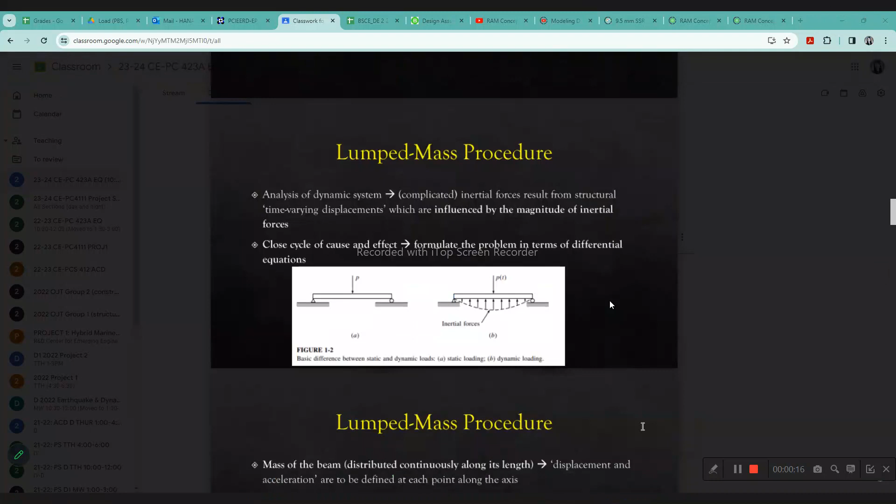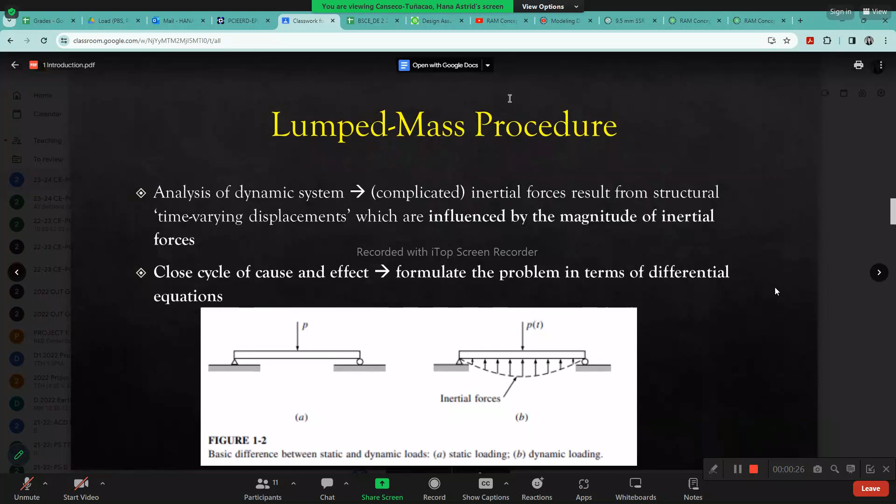So can anyone please leave a recap on what has been discussed before the exam? Hello? Hello? Sandali.

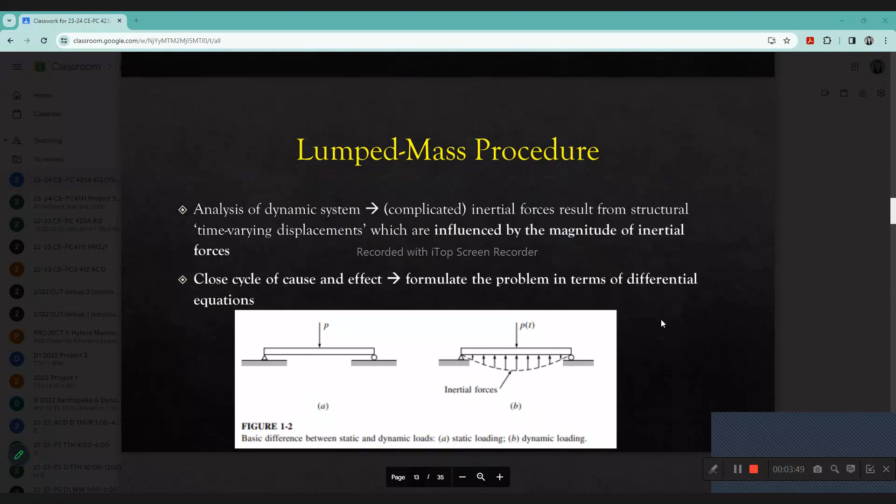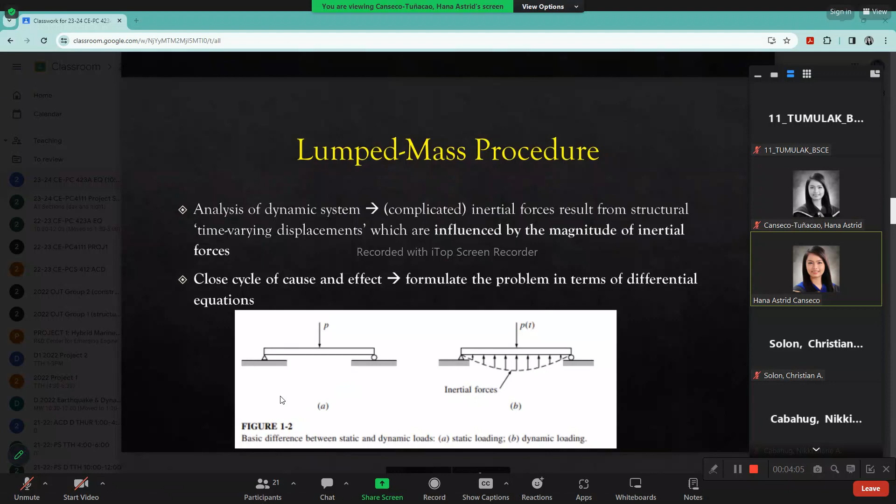Palihog. Sige. So akong i-assume nga ang kanang wala nag-camera on, absent niya.

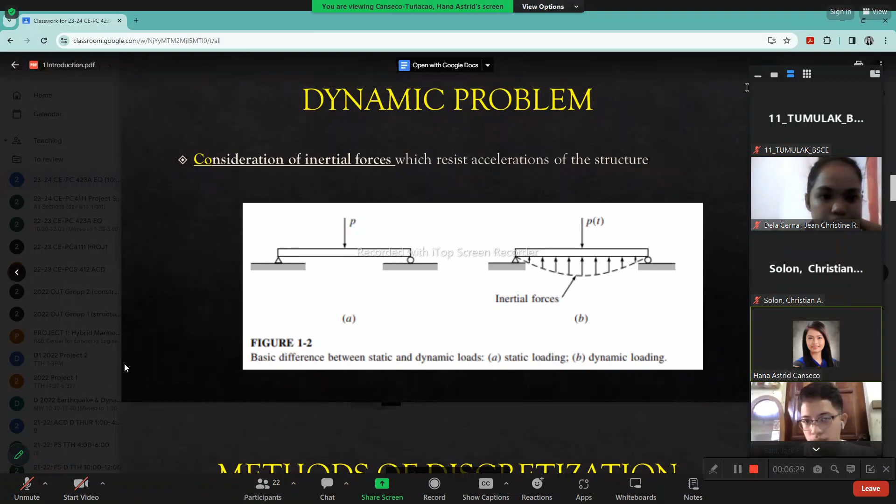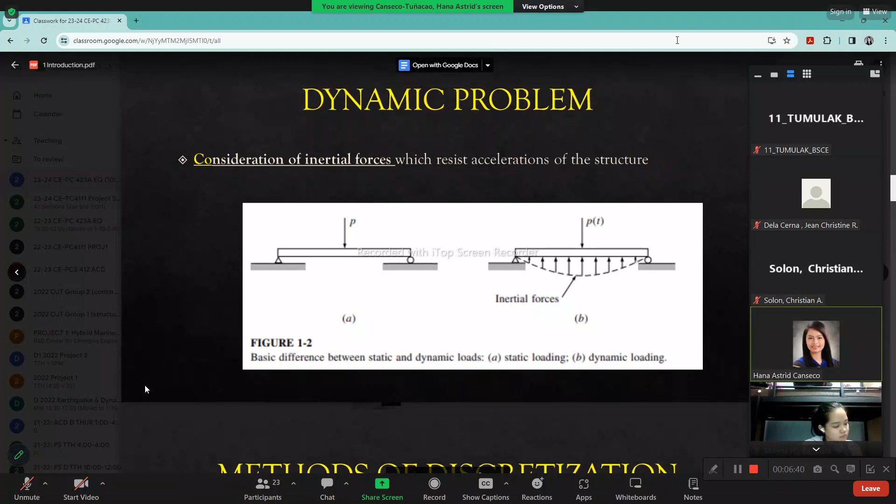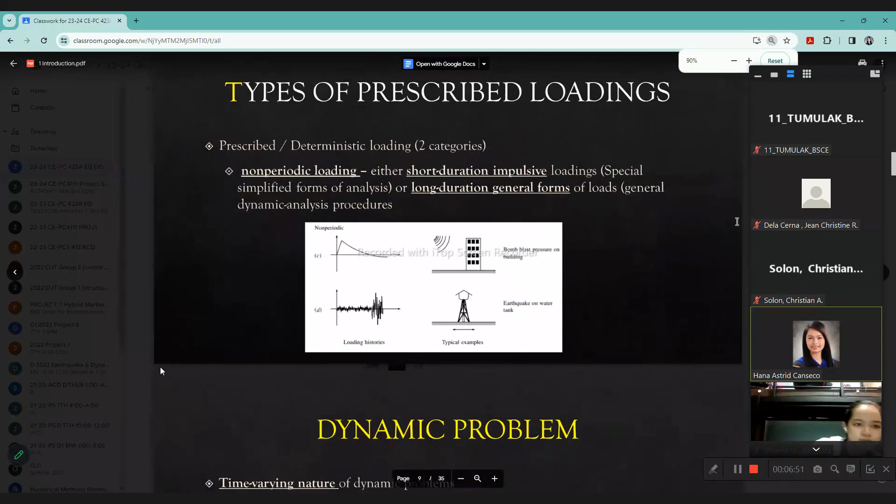Okay, I think manageable na tong midterm exams ninyo, no? Kaya naman siguro to, this year naman ato i-calculate ato, ang ipag-calculate compared to last year. Okay, let's proceed. So I think manataan ni, sakto ba? Manataan ni? Hello? Sorry, yes, okay.

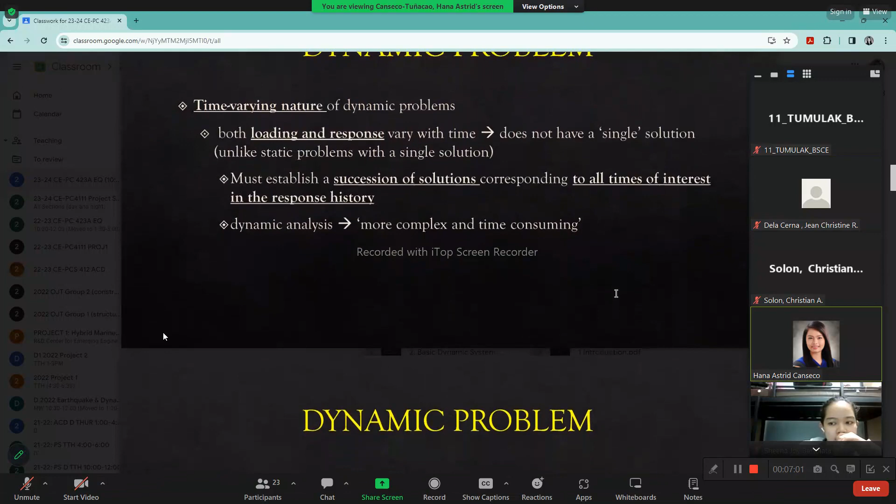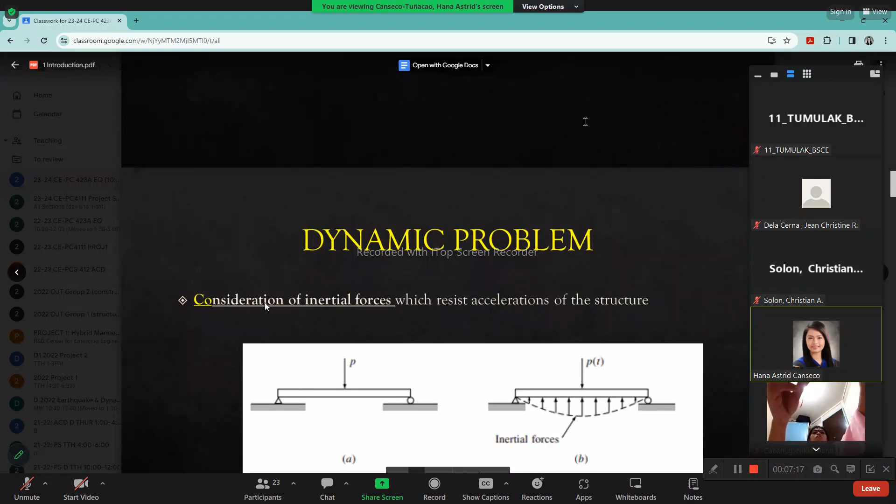Miss, okay, libog ko ang online. Anyways, this is Zoom, no? I prefer to do the Zoom kay makasuwat-suwat ko ba ang Google Meet pa kay kuswito. So expect nga duha ni ka sessions. If maputol, use the same link to join the class again.

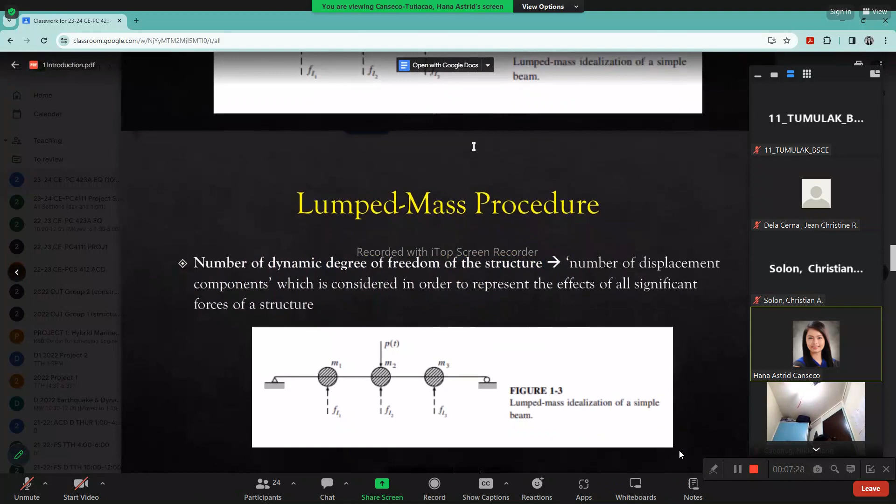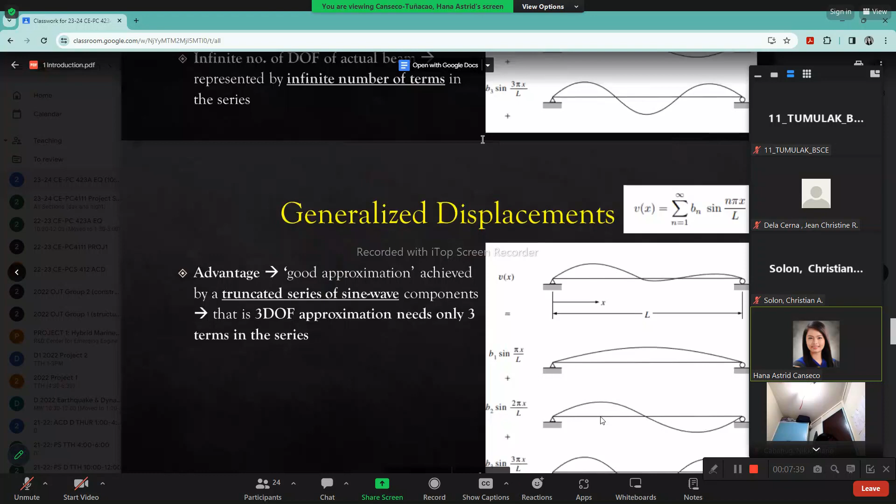Okay, I think manataan aning lumped mass na. Okay, I remember this one. And niabot na ta atong general. We're done with this, so this one. Okay, kani, this was the last equation, if I'm not mistaken. Kani siya. Okay.

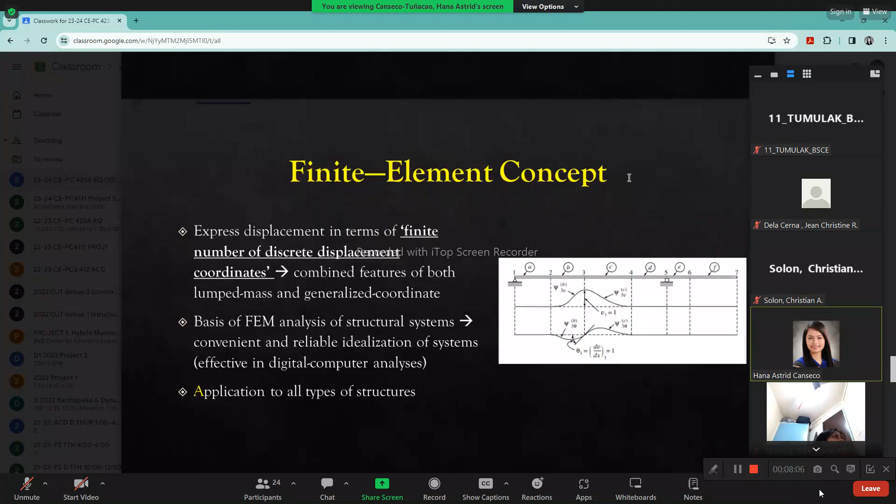Okay, so the next topic, the next discretization is with the use of finite element concept. So it expresses displacements in terms of finite number of discrete displacement coordinates.

So ang atong kasagaran nato ang consideration. Considerations kay ang atong supports, no, kay mga reactions and not. But for this case, kuan na siya, every point ikuan nimo o kita. So mali siya, discrete displacement coordinates, combined features of both the lumped mass in the sense that you are taking lump for every dx considered, and the generalized coordinate wherein you are using your generalized equations. Okay, this is the basis for your finite element analysis of your structural systems, no?

So kung ato ni-inon, manu-manohon ni nato, puto bragyod tag inang klase nga beam ang atong masolve, and it would take much effort on our end, no? But because we already have supercomputers, these are very powerful, so it can analyze full structural systems.

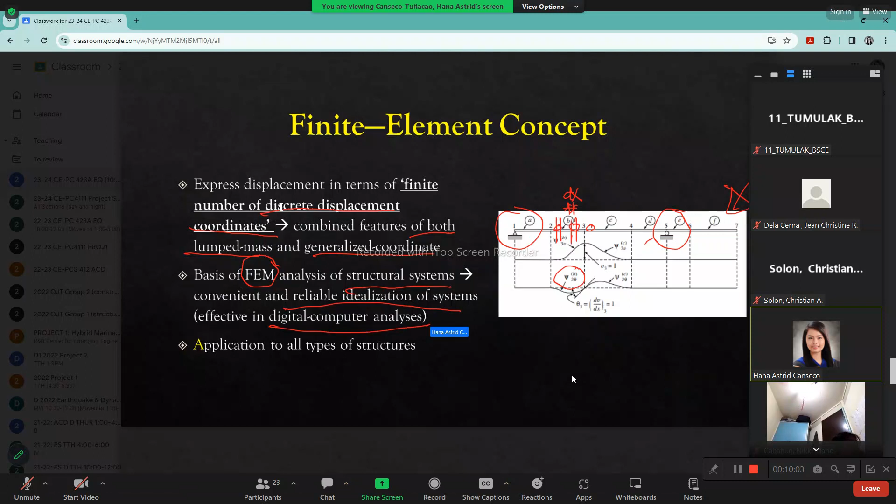So this is convenient and reliable idealization of systems, and is effective in our era, no? So did for the use of digital computer analysis. And this is applied to all types of structures.

So if you notice, we have very many softwares, no, structural analysis softwares. Um, naasay if nakabantay mo, na ay gatuyok, na ay bagong i-introduce na Filipino made software. I think it has been received well. Ang point lang sa uban na nakatanaw, na software is it still uses the conventional analysis. Dili siya finite element.

Nga naagya po kay node o naagya po kay member, node and member analysis siya. Dili siya finite element because this tool, dako kayo imong computational demand ani. I think this is best applied to member behavior. Okay.

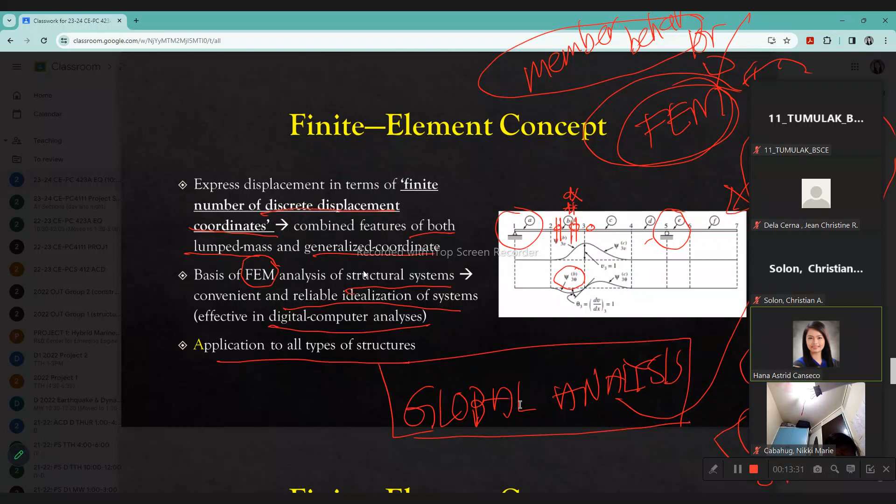Although it's a Filipino software, it's global, but it does not use finite element analysis. So I asked them about the accuracy of the software in a global analysis, since it has taken into consideration global analysis or global behavior of the structure, and whether it would accurately capture member behavior.

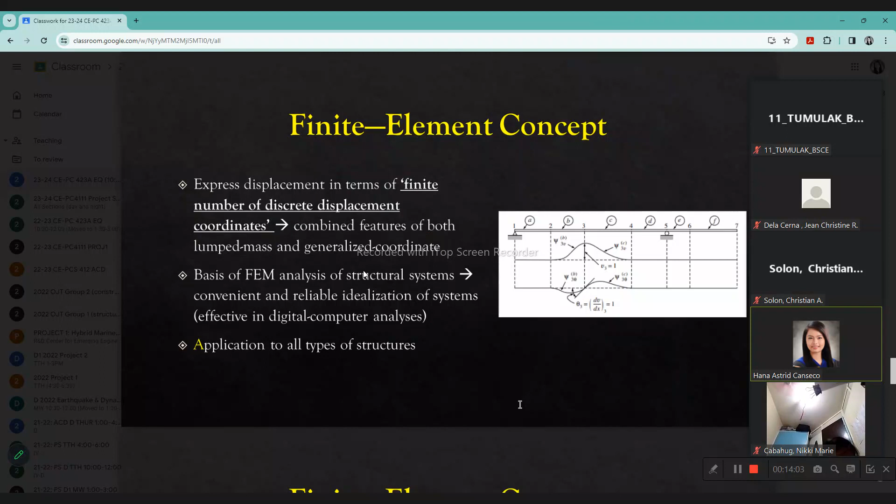Dr. Naveed Anwar said that while the software gives you the necessary stresses and demands, we have to provide engineering judgment because we have to be careful of the member behavior. If there is an aspect of the structure, let's say this one, small and next to your column, we know that this would inherently behave differently compared to these longer, normal-looking beams.

So he said, just to ensure that your design would be on the safer side, you need to run finite element analysis for special members to check on the member behavior. Just need to be careful and we must know the background of the tools that we are using. Okay? Not solely be dependent on the software, and we need to know because we have assumptions.

And these assumptions need to be within certain extent. Like we're designing buildings that are being utilized by many people. There's a lot to discuss about this. So, the basis of... where is it now?

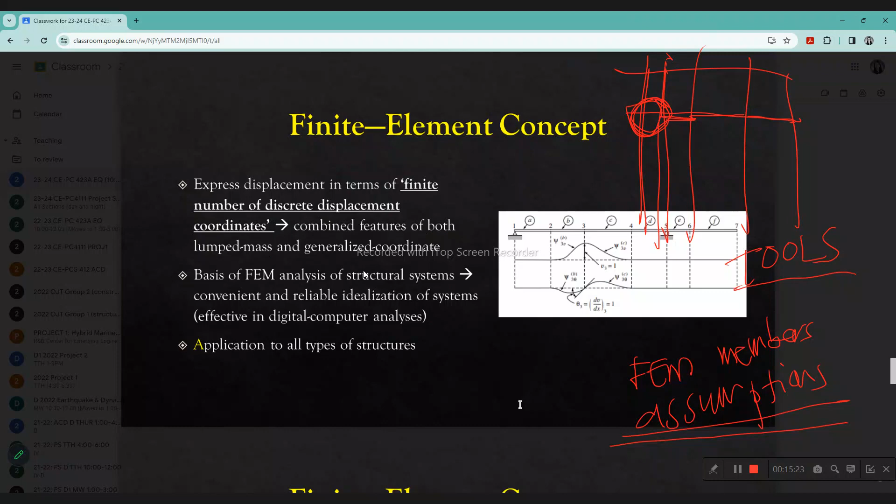Okay, let's go to the next slide. So, obviously, this is the most efficient procedure for expressing displacements of arbitrary structural configuration by means of discrete sets of coordinates. The advantage is the desired number of generalized coordinates introduced by merely dividing the structure into an appropriate number of segments. But the question lies, how many segments are required to reach this level of appropriateness?

How many is many? That's always the question. And what I can tell you is experience can tell you that.

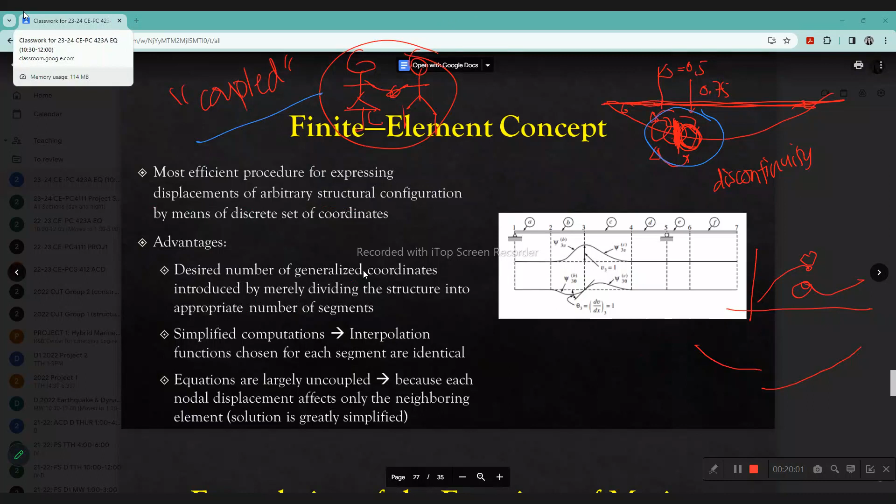I learned the term coupling when I was in master's, and I was confused about what they meant by this. So for this case, my equations are largely uncoupled.

Because of how many segments you consider - this segment and this one is one beam. So for this beam, since it's just one, every cut is coupled to the next.

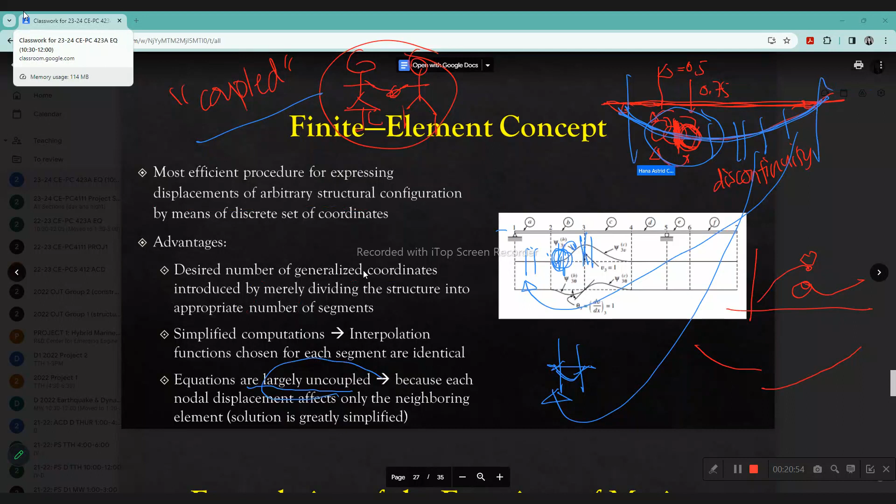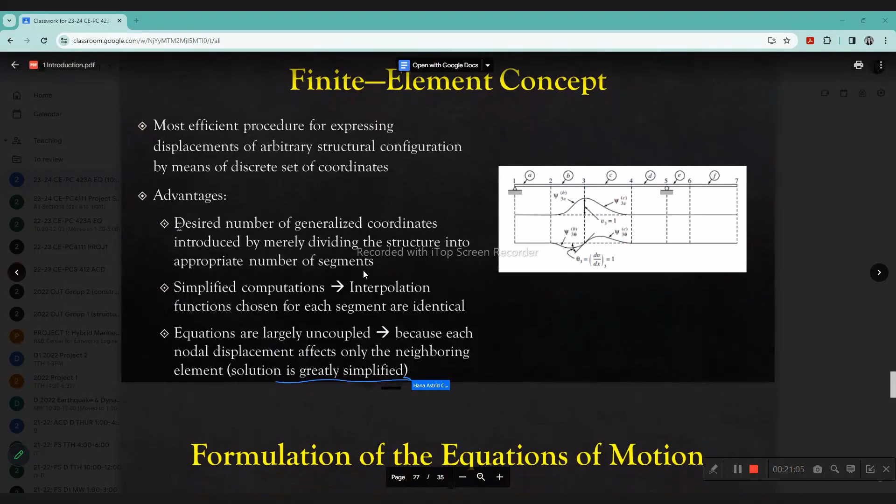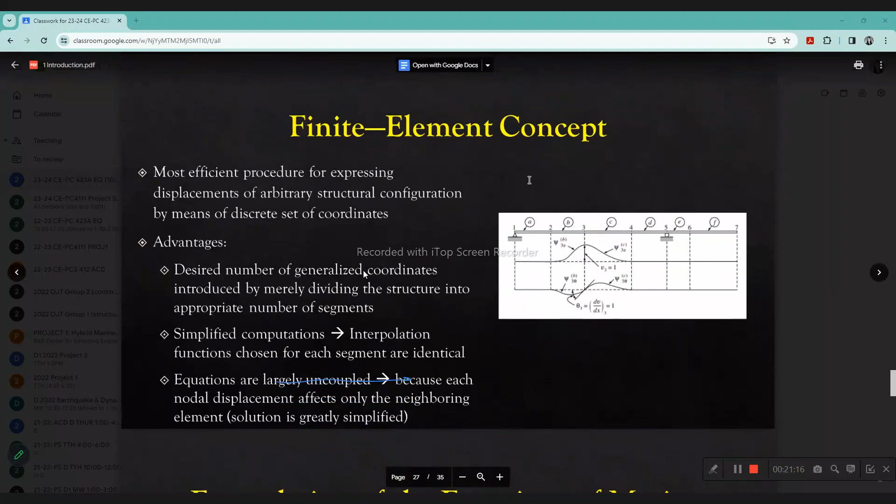Now, the disadvantage of this - if there is a disadvantage, it's next. The disadvantage of this is greater computational effort. The smaller dx you have, the greater your computational effort.

So, formulation of the equation of motion - displacement time histories of a given structure subject to time-varying loading. The objective of deterministic structural dynamic analysis: we're concerned with the displacement. We have displacement time histories dependent on the ever-changing loading histories as well.

With approximation analysis limited to a number of degrees of freedom, the problem is reduced to determination of time histories of selected displacement components, or selected points that we consider. This makes it an approximation, but it makes the analysis shorter and simpler.

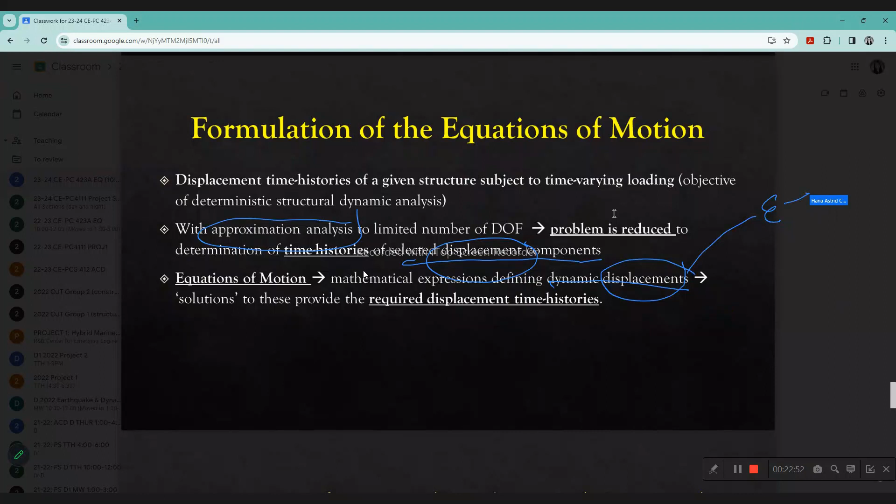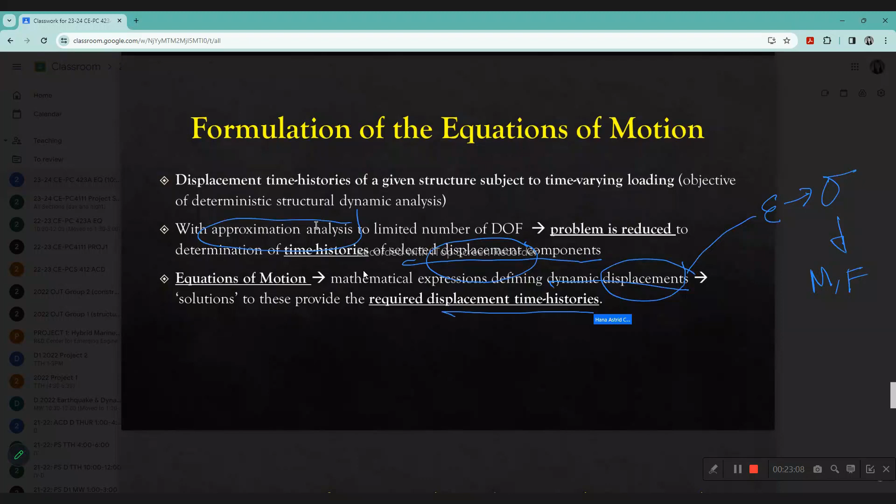The equation of motion is a mathematical expression defining dynamic displacements, because our target is displacement, so we can get our strains and eventually our stresses and demands. Solutions to these provide the required displacement time histories.

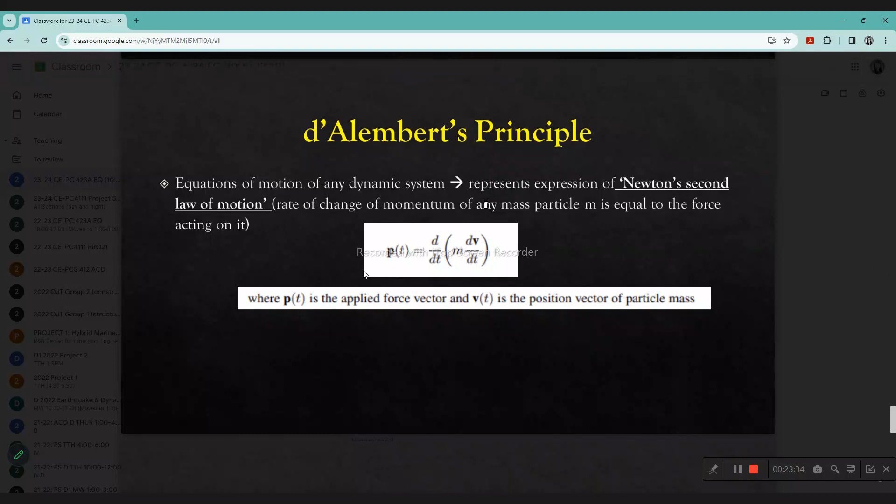Equation of motion is a fundamental concept, based on D'Alembert's principle. The equation of motion of any dynamic system represents expressions of Newton's second law of motion: the rate of change of momentum of any mass particle m is equal to the force acting on it.

P(t) is the force, your applied force vector, and v(t) is the position vector of your mass particle. This is the second law of motion.

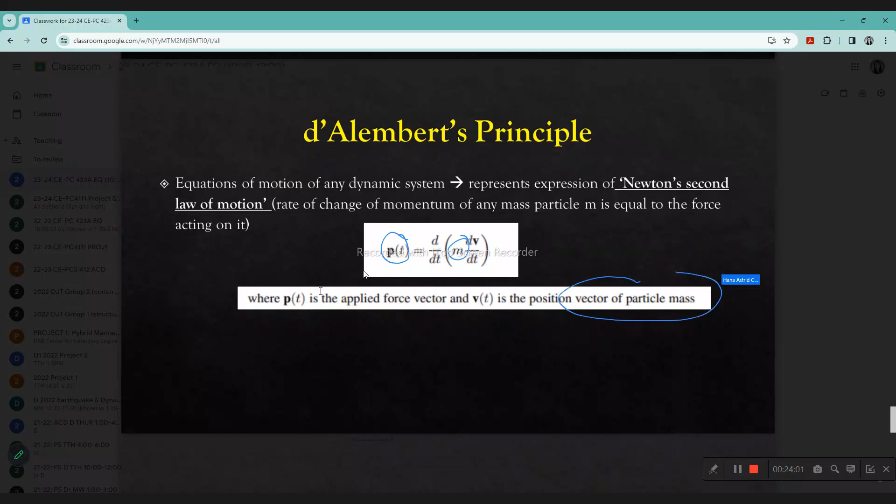For most structural dynamic problems, mass is constant, meaning it does not vary with time. Which makes sense - our building weight is constant, it doesn't change.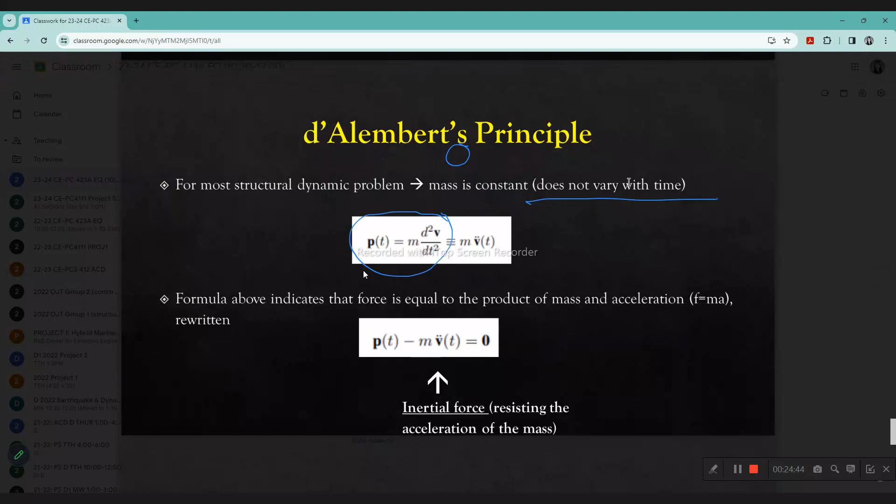Since we derive this whole term knowing mass is constant, this changes to the second derivative of v with respect to time, or simply v double-dot, representing acceleration. The formula indicates that this varying force is equal to the product of mass and acceleration, that is F equals mA.

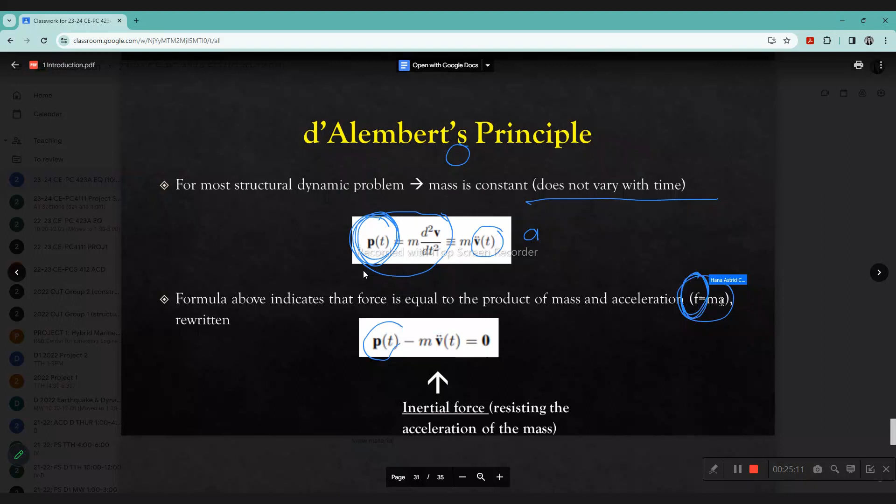If your F is varying with time, and consequently your A is also changing with time, it is rewritten as this, where this part right here is your inertial force resisting the acceleration of the mass, coupled with your acceleration.

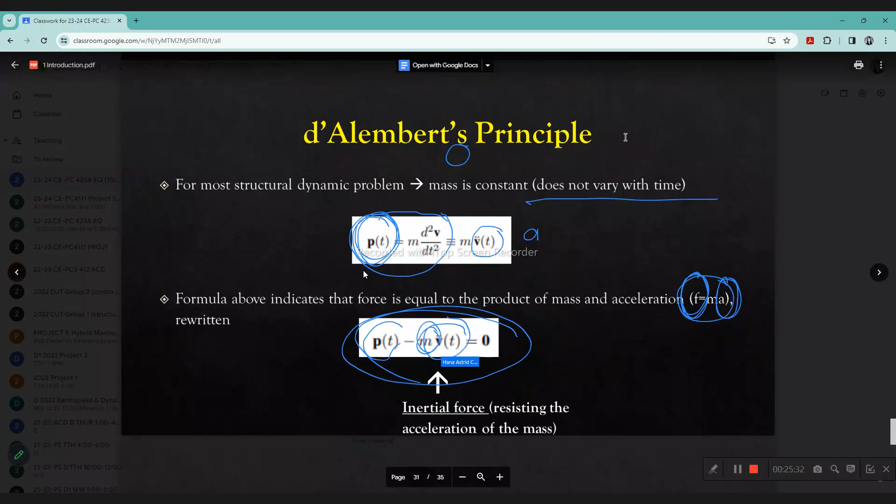So the concept is a mass develops an inertial force proportional to its acceleration and opposing it. This is very convenient in structural dynamics. It permits the equation of motion to be expressed as an equation of dynamic equilibrium - equated to zero and still in equilibrium, but here we consider dynamic equilibrium by accounting for all the objects in motion.

P(t) represents the types of forces acting on the mass: elastic constraints which oppose displacements, viscous forces which resist velocities, and independently defined loads. The equation of motion becomes an expression of equilibrium of all forces acting on the mass - whether it be external load, elastic constraints which oppose displacement, or viscous forces which resist velocities.

Elastic constraints which oppose displacement - what I can think of is a spring. Your spring has an elastic property, which we usually call K. This elastic property opposes displacement; it has that nature of opposition.

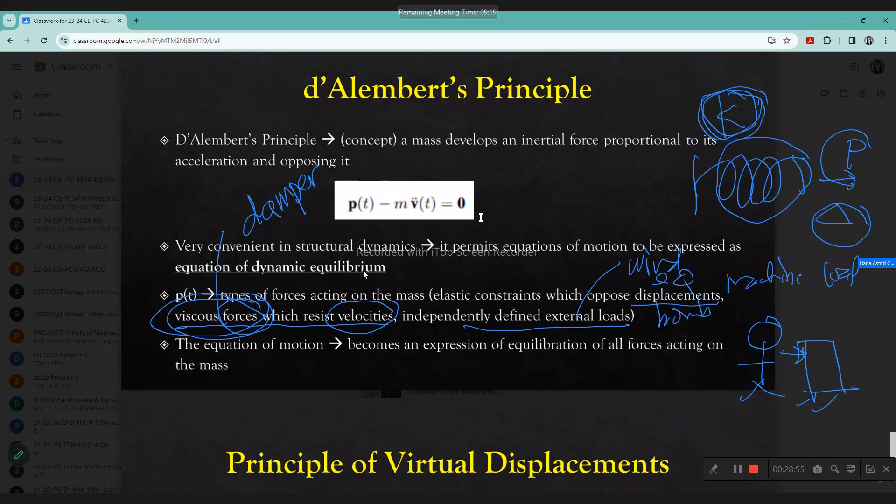And our independently defined external load - for example, if I were to push on something, that's external load. But for realistic schemes, this would include wind load, earthquake load, blast load, machine load, etc. We discussed this already earlier - the equation of motion becomes an expression of the equilibrium of all these forces acting on your mass.

So let's do the basic dynamic system in our response spectrum. We have this, the components of a basic dynamic system.

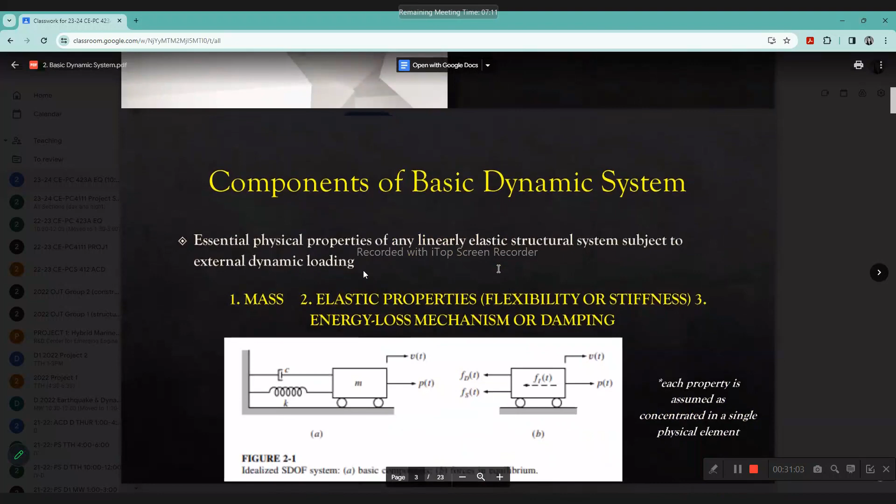Essential physical properties of any linearly elastic structural system subject to external loading: you have your mass, your elastic property or flexibility. Stiffness is one over flexibility - they are inversely proportional, but both define elastic behavior, or elastic properties.

And then we have your energy loss mechanism, commonly known as damping. Let's take a look at this figure - this is your basic component. Note that each property is assumed as concentrated in a single physical element.

This is your basic, idealized single degree of freedom system - imagine a building. You have your damping represented by a dashpot.

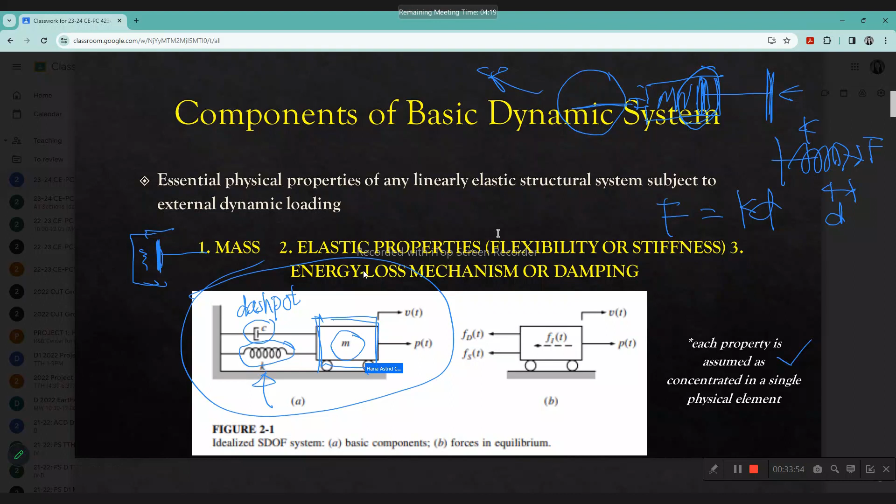That's from basic physics, force is equal to K times displacement. Okay, spring. The force, your K, or your displacement - change in length, or delta. Delta, change in length of your spring. And then we have the mass of your structure. So, in equilibrium condition, your mass is associated with your inertial force.

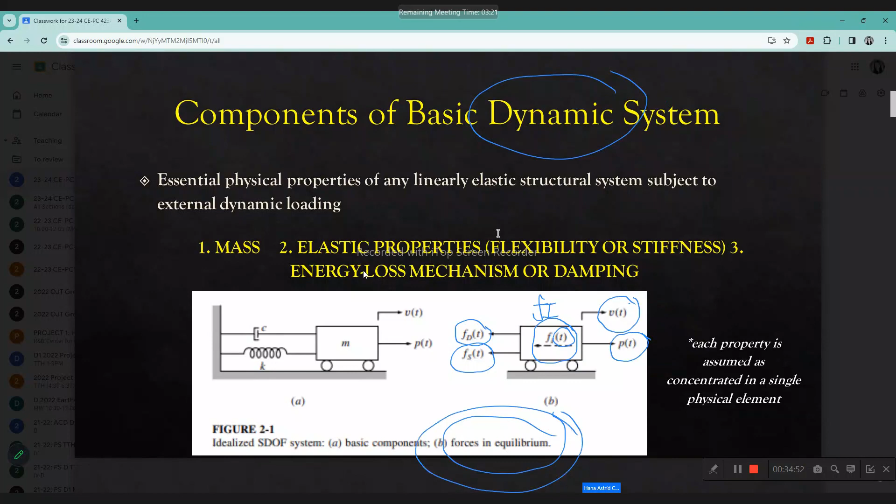That is Fi. Please take note everyone, all of the components have a 't' notation because it's considered dynamic behavior and it changes with time. This is your FD representing your damping force, and Fs representing your elastic force. This represents your displacement - displacement vector, that's V, changes with time. And this is your applied load. That is your forces in equilibrium conditions.

So mass is the rigid block with rollers. It moves in simple translation, that is, we have one directional displacement. We have 1 degree of freedom, and that is, for this case, along the x direction. Vt represents your one directional displacement relative to time. Elastic resistance to displacement is provided by your weightless spring

with stiffness K. You have your energy loss mechanism represented by your damper C, and external dynamic loading producing the response of the system as a time-varying force. So it's always emphasized that the spring is weightless.

Let me ask, where does the K come from in your building? Where does the spring come from in your building? Can I have Lisa? ... Yes, column, column stiffness. This is actually representing your member stiffness, from the column, from the beam, from the slabs. All of your members have stiffness.

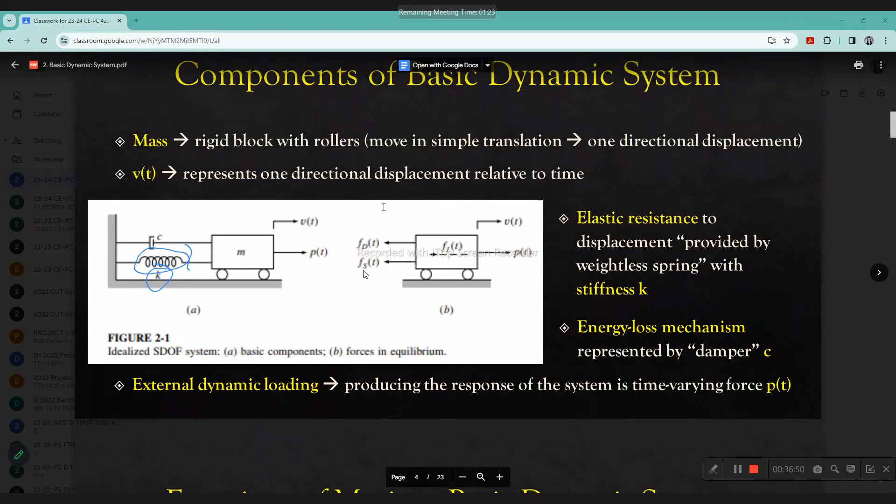Thank you, Lisa. And then, it can be formulated by directly expressing equilibrium of all forces acting on the mass. So, summing forces in X - you have your applied force and your resisting force resulting from the motion. That is inertial force Fi, damping force Fd, and spring force Fs. So summing all the forces, these three are equal to your applied external load. And all of these are functions of displacement Vt, or one of its time derivatives.

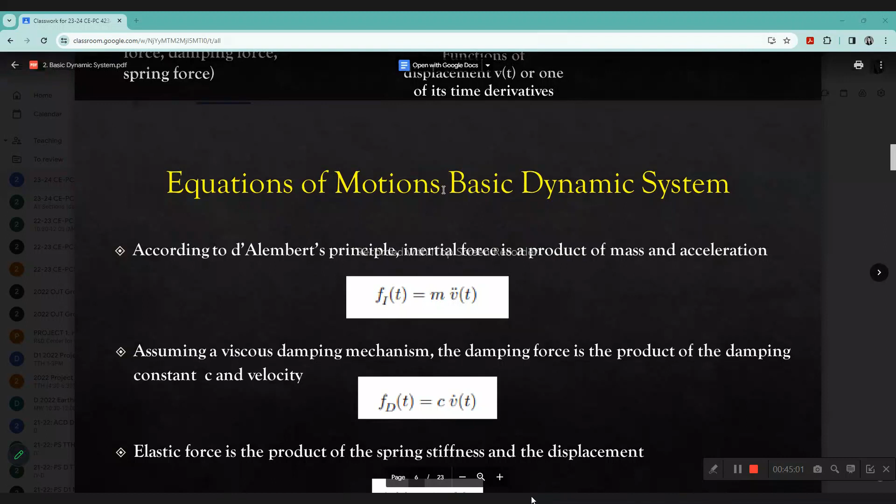According to D'Alembert's principle, inertial force is a product of mass and acceleration. So we see here, F is equal to ma. Your inertial force is equal to your mass times the acceleration. It's written as V double dot.

V double dot represents acceleration, V dot as velocity, and displacement as V. Your V dot is the first derivative of your V. Your V double dot is the first derivative of velocity, or the second derivative of displacement. So there are two derivatives here. Some books would refer to this as U dot, U double dot. We're also very familiar with this.

Elastic force is the product of the spring stiffness and displacement, given by F equals KD or K delta. We learned this in high school as a spring problem. Your spring force is equal to your stiffness times your displacement. These two are not a problem, but this next one is actually something new to us.

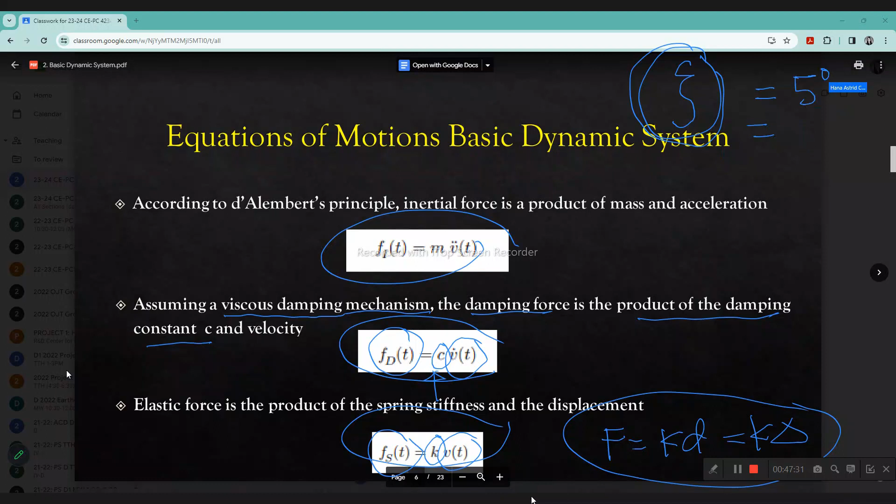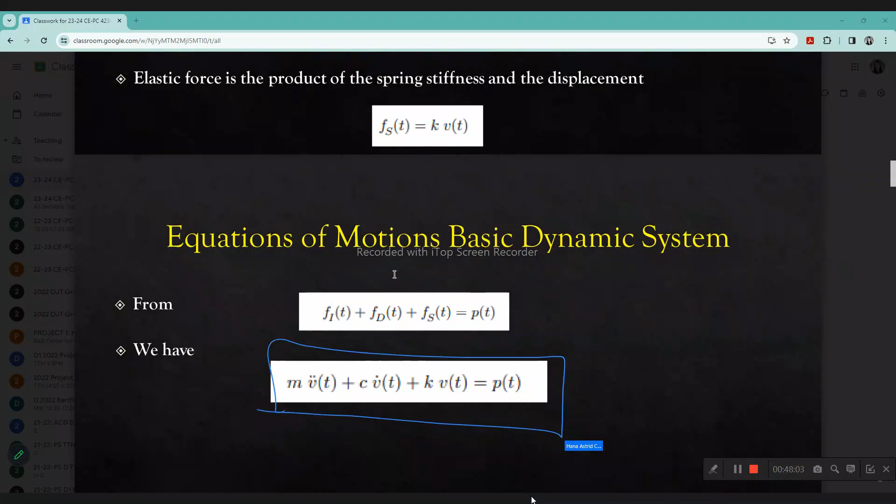From this, the equilibrium condition can be rewritten into this form, and this equation is our basic dynamic system.

So what I do, not to limit myself to just the basic dynamic equation, is to make this familiar.

My professor back then for structural dynamics, Professor Van, his revelation to me was that damping is a big question. Inherent damping is a big question.

We know we can measure this. We can also quantify its stiffness, and we can obviously quantify mass. But in the equation, it does not sum up.

There is an unknown term that makes the equation closer, that captures the external force better if we add another term. Damping has been a big question mark such that we just give approximations — for RC it's 5%, and for steel it's 3%. That approximation is not even accurate.

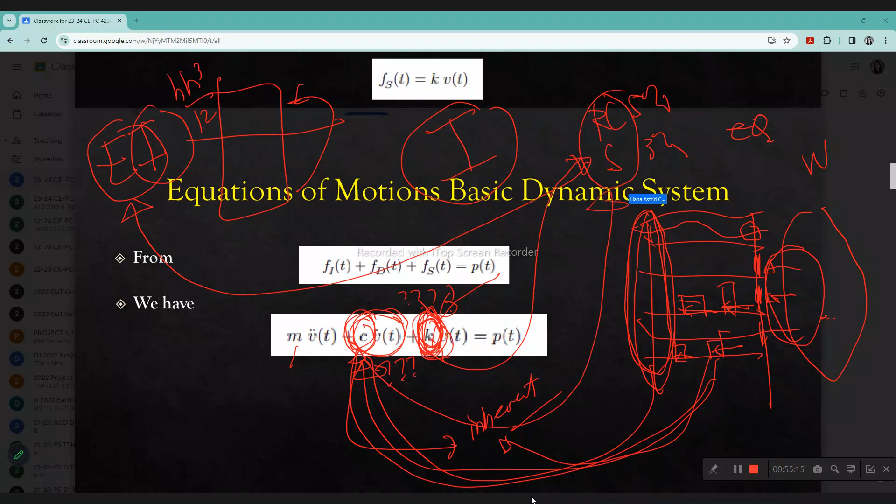But when you consider RC or steel, that's already accounted for in your ES or EC. So why does damping still consider whether your structure is steel or RC? It's because your building has different energy rates.

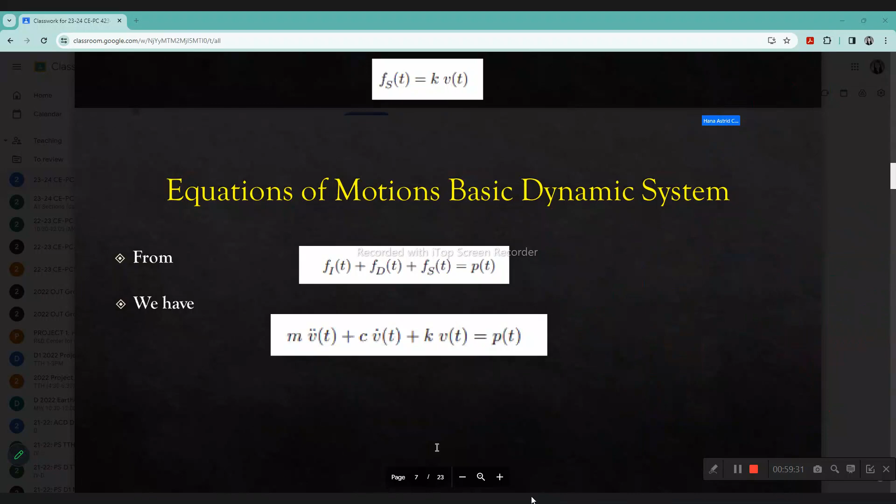But then you need to control the sway and the drift because we have certain limits. Okay? I hope that's clear.

Guys, kaya pa? Thumbs up if kaya pa. Dali, dali. Thumbs up, guys, kaya pa.

So let's proceed to support excitation. So, dynamic stresses and deflections are not only induced through time-varying applied loads, but also by the motion of support points. We discussed this before.

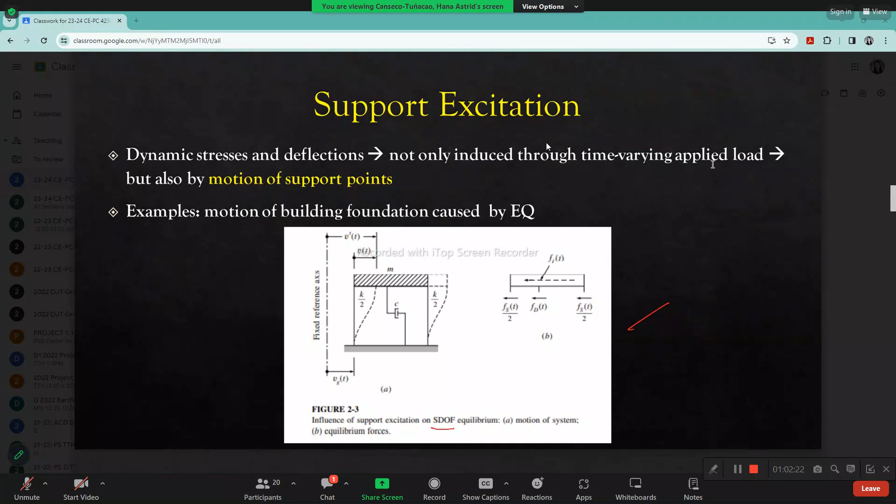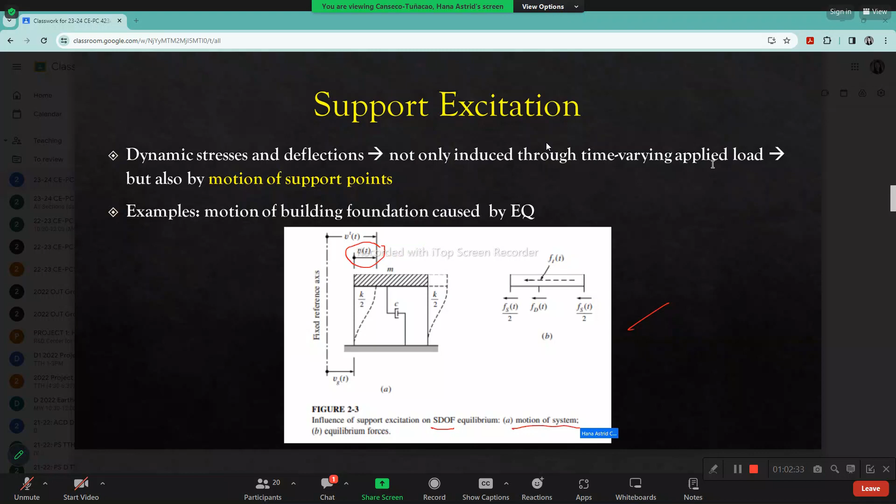So for this, we have the influence of support excitation on a single degree of freedom equilibrium. We're still considering single degree of freedom, where the translation is still in the x direction. Figure A shows the motion of the system, and Figure B shows the equilibrium of forces.

Let's go to the next page. The horizontal ground motion caused by the earthquake is indicated by the displacement vg(t) given here. Originally, your building is here, and your slab carries the lumped mass. It has been excited by this displacement, so this is the displacement VG, ground displacement, which also varies with time of the structure's base relative to the reference axis. So let's say this is your reference axis, where the building was before it got excited.

The horizontal girder is assumed to be rigid and includes all the moving mass of the structure. So imagine on your structure, you only have your column support. The column is assumed weightless, and all of its mass is considered lumped at the floor level, and inextensible in the vertical or axial direction.

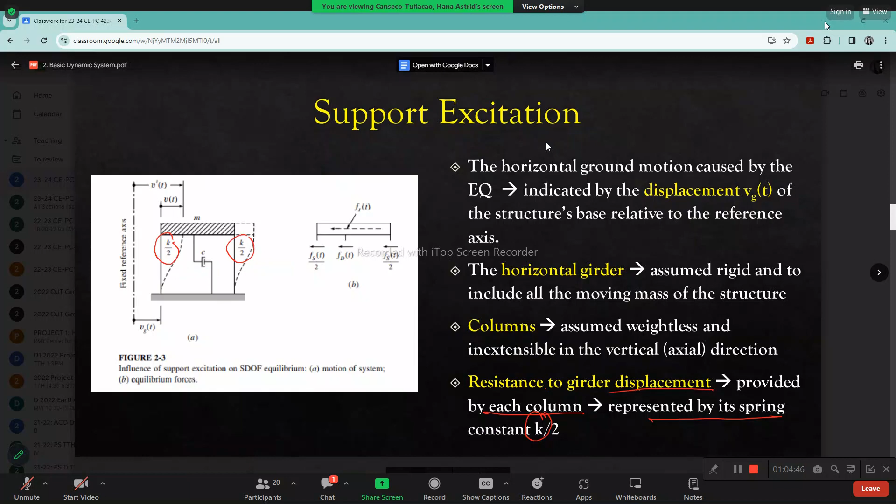Yes, so our mass has a single degree of freedom along the x-axis for this case, represented by vt, and this is associated with the column flexure. Flexure means it is related to bending.

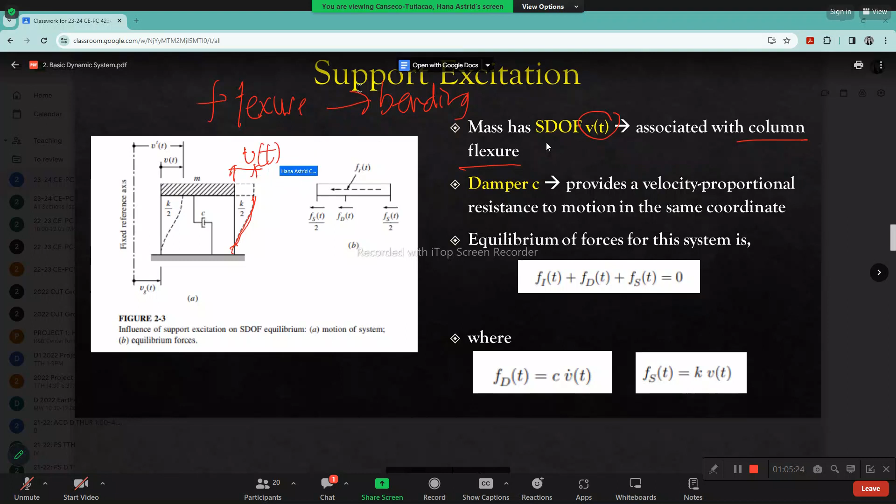So our displacement is related to how our column bends, that's column flexure. And damper C, represented by your dashpot on the right side,

provides a velocity proportional resistance to motion in the same coordinate. Equilibrium of forces in the system is given as this equation, from your two columns, from your dashpot, and from your inertia force.

So from here, summing forces, we can see that on one side we don't have PT, so obviously that's zero. So that becomes negative inertia plus damping plus stiffness equal to zero.

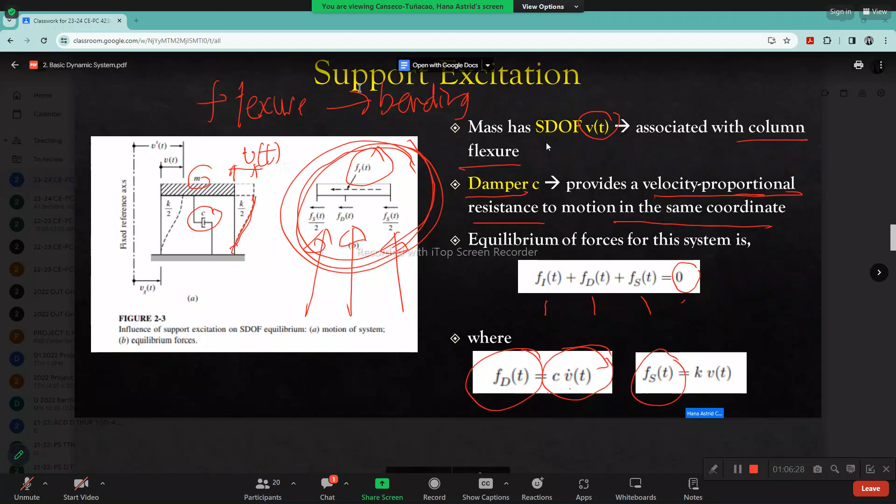Where the damping force is C times velocity, and your spring force is K times displacement. So to get the equation, we need your mass, your C, and your displacement.

Assumption: the structural deformation caused by the ground acceleration is exactly the same as that produced by your external load PT. So we have to consider that this is not always the case.

If we cut it here, let's finish this part. This is elastic response only. If not for your ground displacement, we need to consider this term.

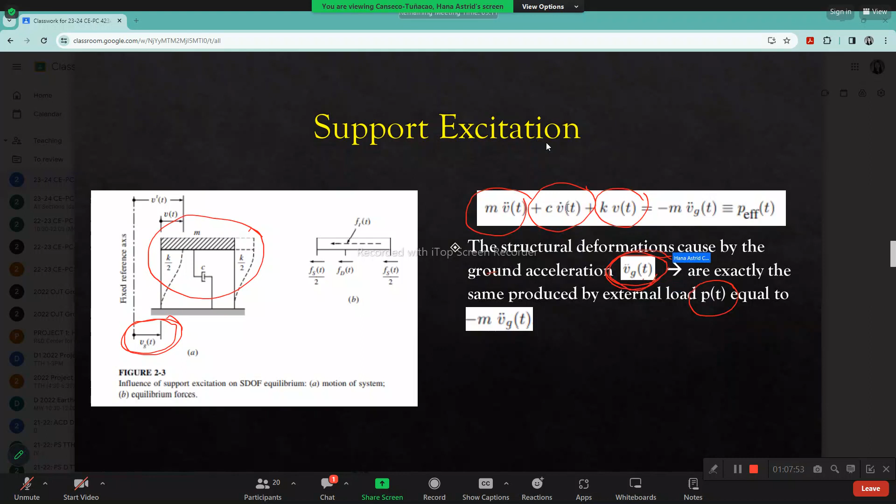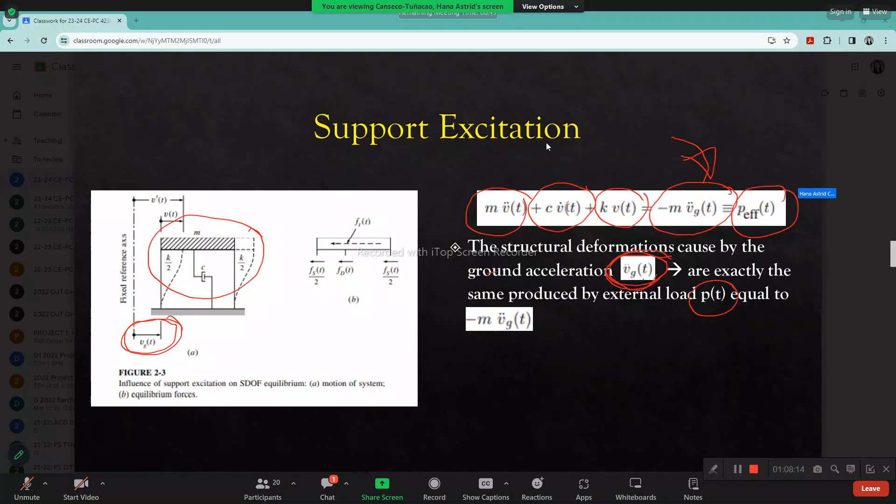It's still the ground acceleration being discussed. Structural deformation caused by ground acceleration - since it's acceleration, its pair would be your mass. So one side of this equation would equate the dynamic equation. For this case, our earthquake input comes in here, sometimes called P effective, if we are considering support excitation.